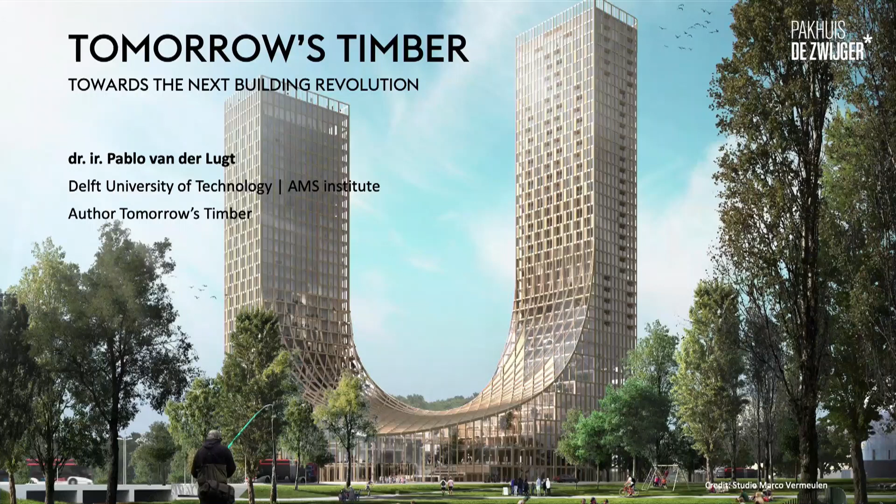Today, I'll show you the future of the building industry. And it's not only circular, but it's also renewable, with an important role for mass timber. There are two important existential reasons why this is so important.

One, climate change. If we look at the greenhouse gas emissions worldwide, then 40% is related to the built environment. If we look at the CO2 emissions of a country such as China and the United States, and we compare it with concrete, concrete would have been the third country worldwide in terms of CO2 emissions. The same applies to metals and plastics combined. So together, they contribute to 15% of the global CO2 emissions.

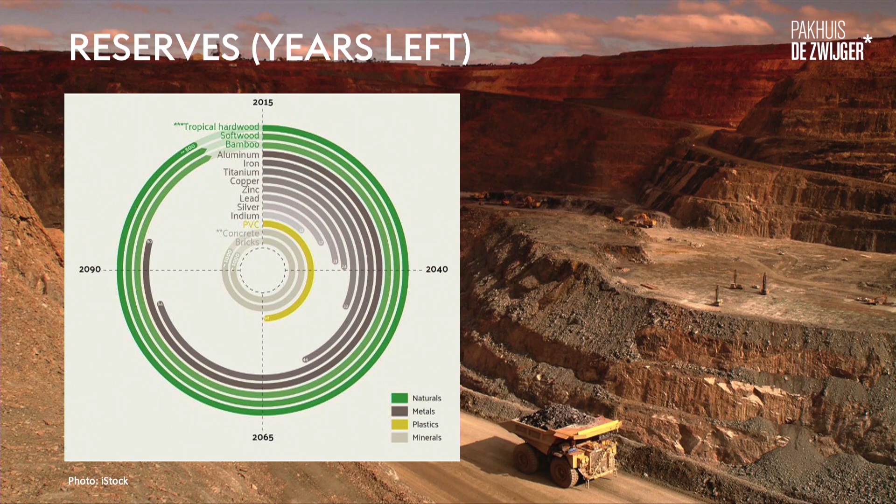In this graph, you see the reserves of the most important materials. And you also see that by the end of this century, metals used in the building industry will be depleted. And the same applies to plastics. And don't put all your money on the circular economy, because only 9% of all our materials worldwide are actually being recycled.

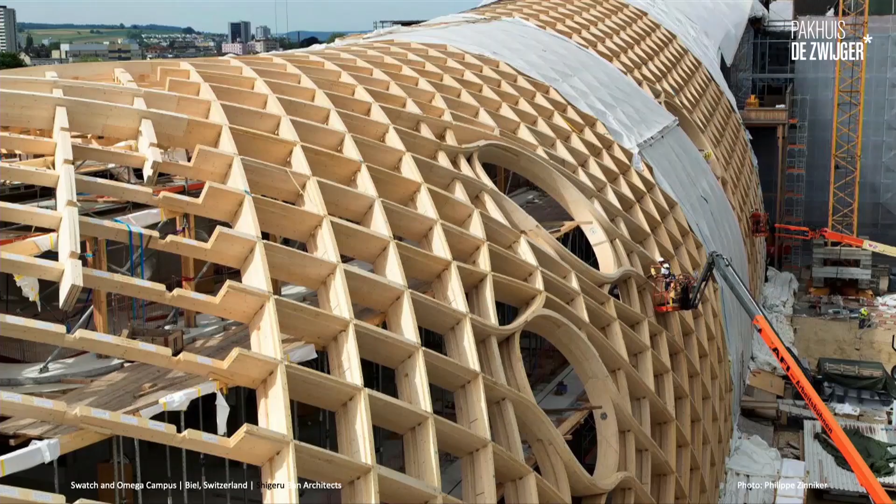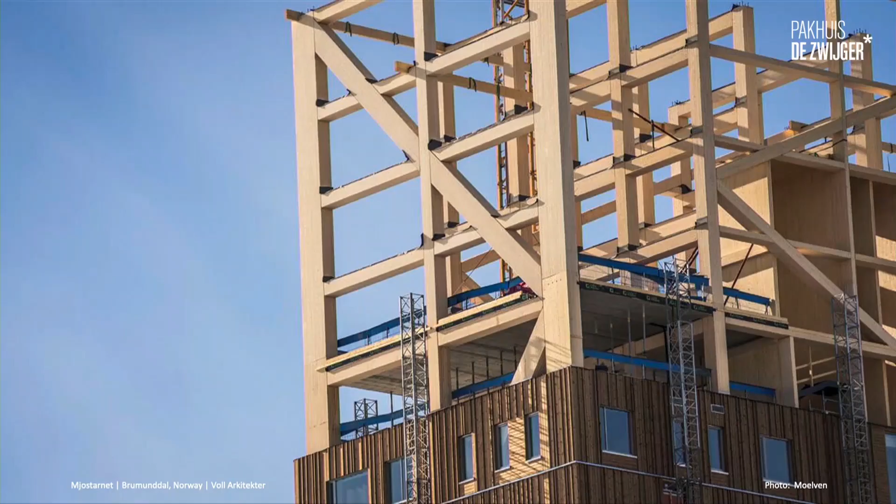I compare it like building with Kapla. Maybe you have done it in the past. Very rectangular, evenly strong wooden elements are used to create all kinds of buildings and fantasies. Well, this is not fantasy anymore, because this is Kapla for grown-ups. This is mass timber. So you can make enormous structures out of uniform elements with mass timber. And we can also build skyscrapers this way. This building is 85.4 meters tall. It's in Norway, built with glulam beams and cross-laminated timber.

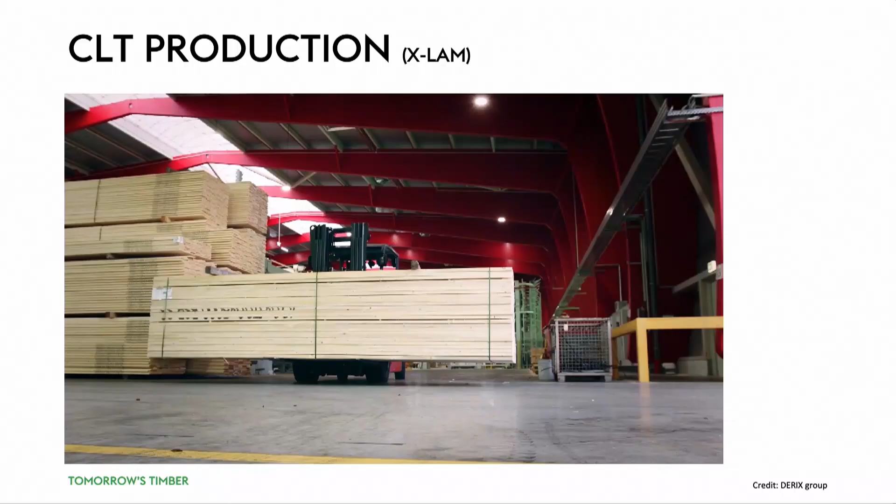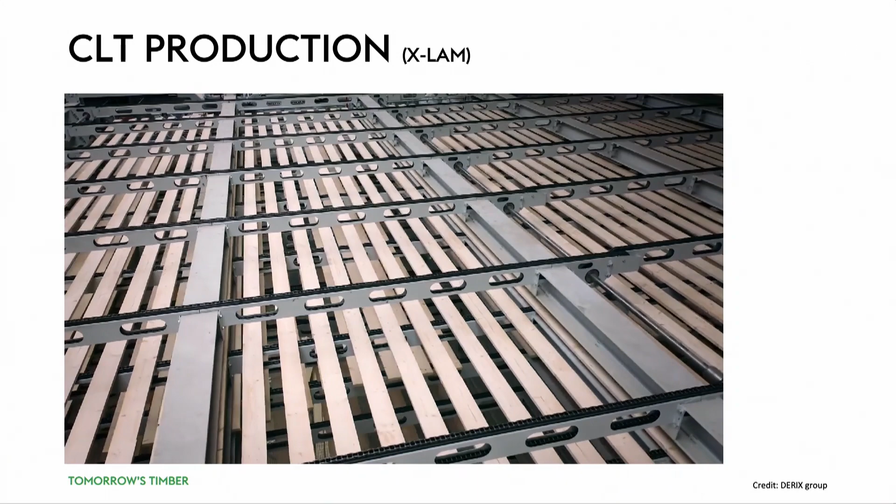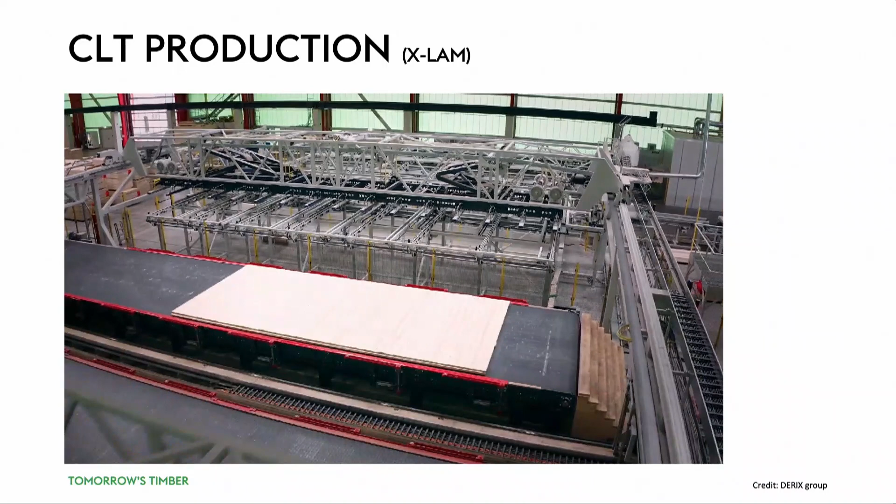I'll show you how this is produced. From sustainably managed forest, you take boards from softwoods, abundantly available. Then these boards are connected to each other in a longitudinal way with a finger joint. So you have very long boards where all the defects are taken out. So uniform strength. Then you locate them on top of each other, and then you cross-laminate them. And then again, up to 3, 9, maybe even 11 layers thick. The glue that's used, it's only 1%, and that binds the walls and slabs together to get a very strong wall or flooring element.

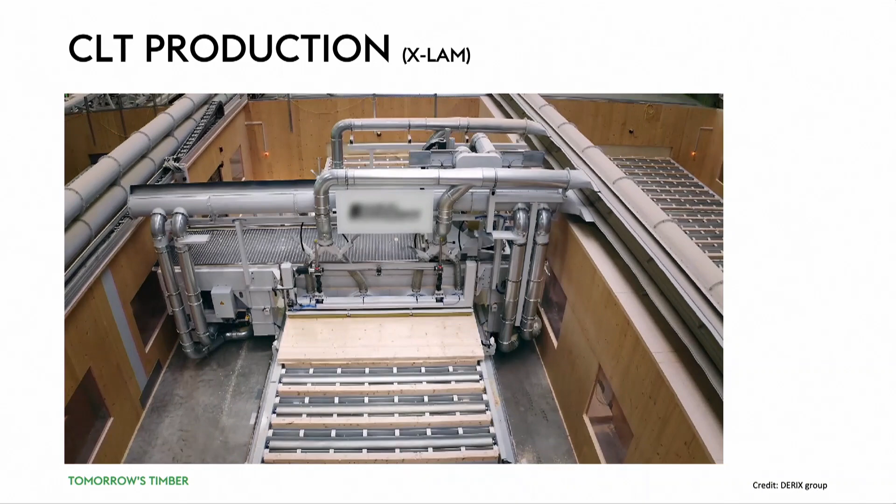The good part is, in the factory, as you see here, you can add all the fittings, all the sleeves for the electricity, for the installations. And then your building site becomes like an assembly site. It's almost like a huge IKEA cupboard. Everything comes pre-packed, you take it out of the package and install the building in a very quick manner.

So this is an example of cross-laminated timber. So you see here the various layers that are being used. The top layer can have, for example, an oak finish or another more luxurious wood type. So this way we can build very high buildings in a very quick way.

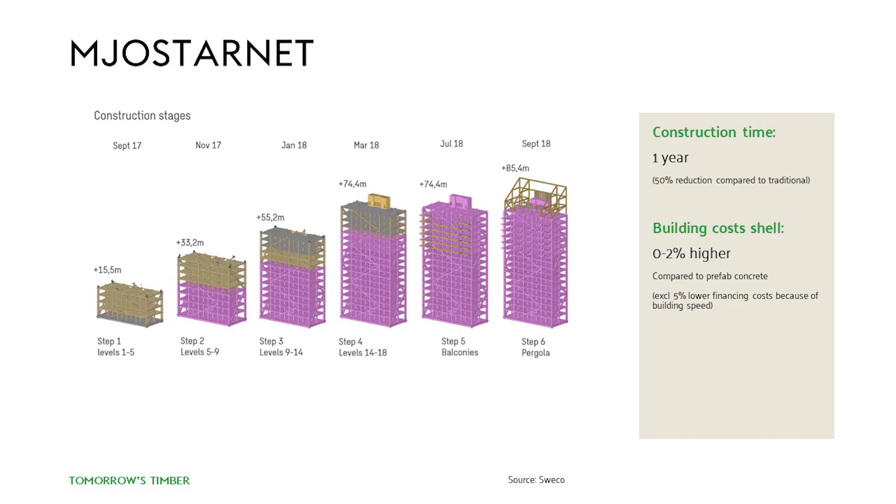The tallest building so far, the Mjøstårnet building in Norway, I told you, almost 86 meters high. And it was built also with all these prefabricated elements. And the construction time was 1 year quicker than it would have been built in in situ concrete. Altogether, the building costs are more or less as high as building in prefab concrete. Then if we look at the biggest myths, because I hear your brains already thinking, okay, very interesting, but what about fire safety? Is this durable?

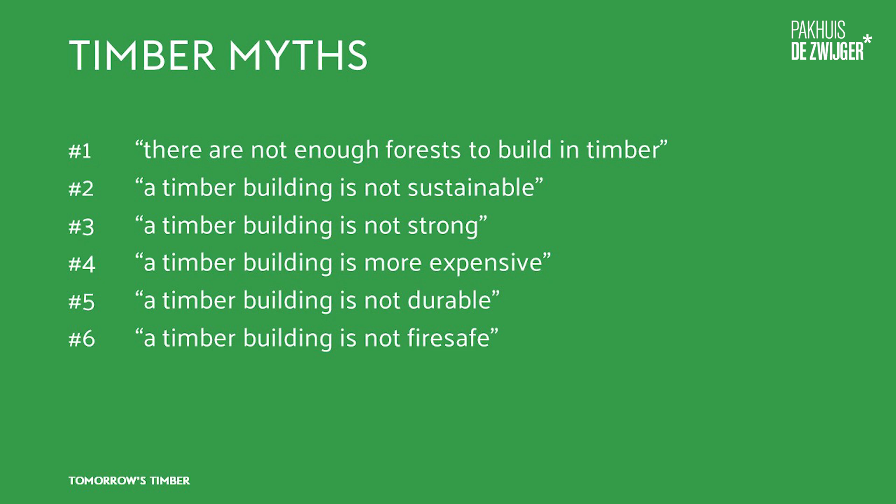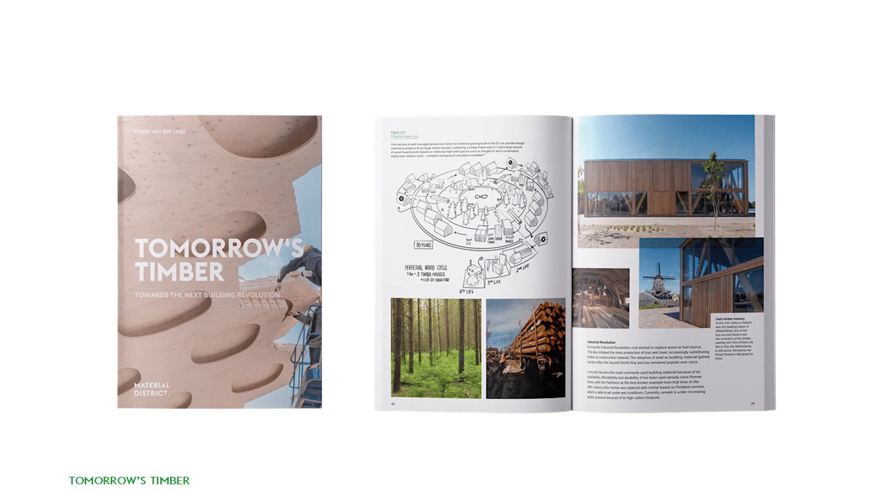So there are many myths about mass timber building. And actually I had these questions also about 5 years ago. And I did a lot of research about it, and I published it in this book, Tomorrow's Timber. And I can tell you most of these fables can be dispelled. And I'll tackle a couple of them in this presentation.

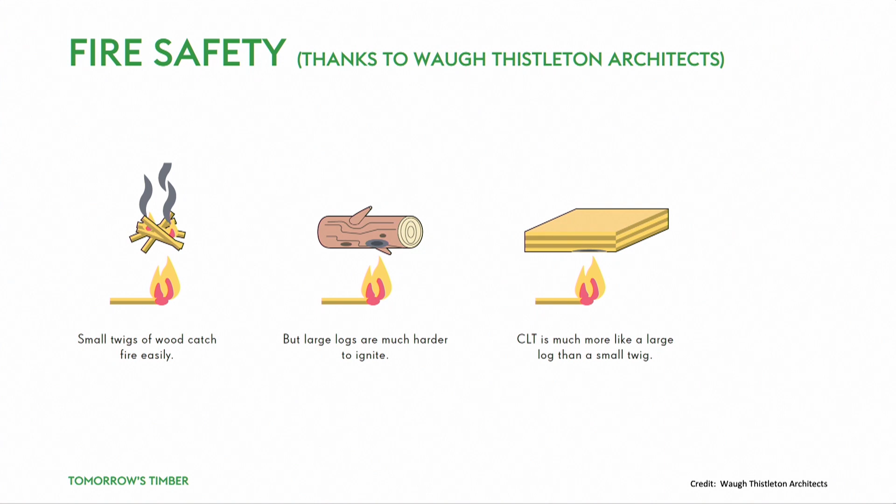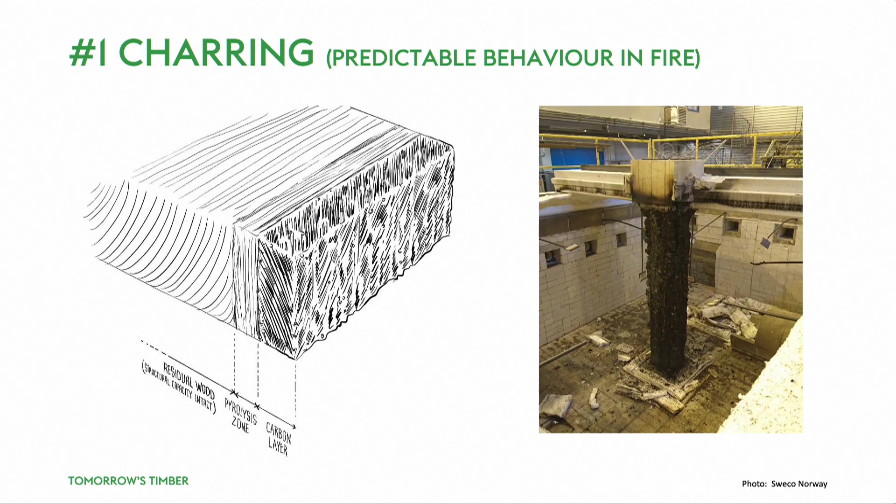Fire safety. Well, if you try to put this block in your fireplace, you can imagine what happens. It will extinguish, it won't burn. You maybe have a little bit of charring. And that's also how we tackle fire safety in mass timber building. The example on the right is a one-on-one fire safety test on this Mjøstårnet building in Norway to reach the 120-minute fire safety class. And they just do it by over-dimensioning slightly and knowing that at the outer layer of the wood, there will be a charring layer. And behind this charring layer, the wood will keep its structural quality. So you can exactly do the calculations.

Usually it is combined with encapsulation, so part of the timber will be finished, for example, with gypsum board, and combined you easily reach all the fire safety classes. So usually it's done this way. One of the surfaces is kept intact, and further a little bit of over-dimensioning, taking into account the charring. So these are fables that can quickly be dispelled. Fire safety is not an issue, durability is not an issue.

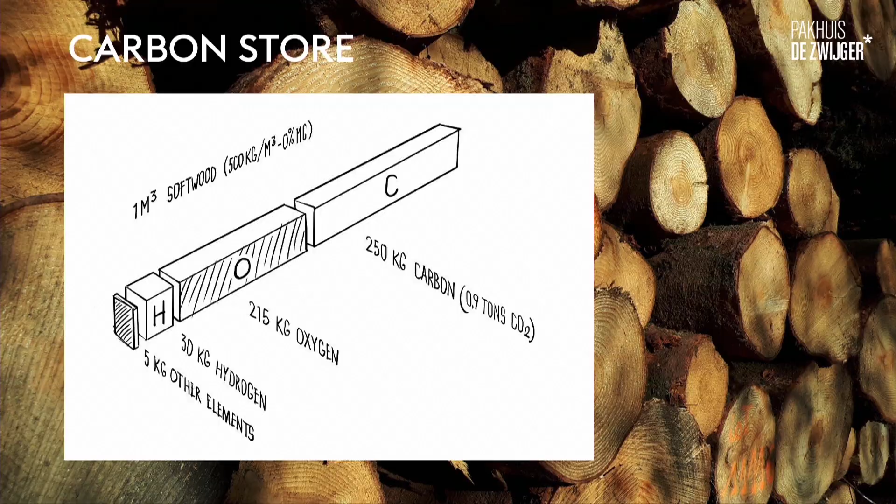But let's look at the more positive things about building with wood, because building with wood gives a lot of fun and energy. It's good for the planet, it's good for people. So let me quickly take you through some evidence. Well, first of all, when trees grow, they absorb CO2 from the atmosphere. This is the magical formula, photosynthesis. Storing CO2 in the wood, oxygen as a bonus in return. And through the lifetime of the wood, the carbon will be locked in the material. Half of the wood's weight is carbon coming out of the atmosphere. In general, you can say that 1 cubic meter of wood captures almost 1 ton of CO2 for the lifetime. So it's a kind of carbon store.

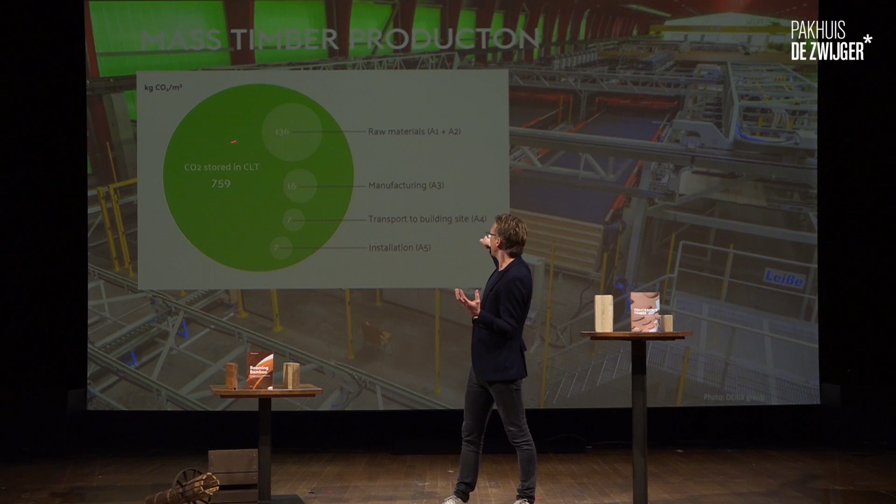And then if you look at the CO2 emissions during production of CLT, I just showed you this factory, you can see here that CLT uses a little bit lighter wood species, so it captures a little bit less CO2, almost 3/4 of a ton. And then you see during production, in total, glue and energy for pressing, sawing, transport, it is only 20% CO2 emissions compared to the CO2 locked during the lifetime of the material.

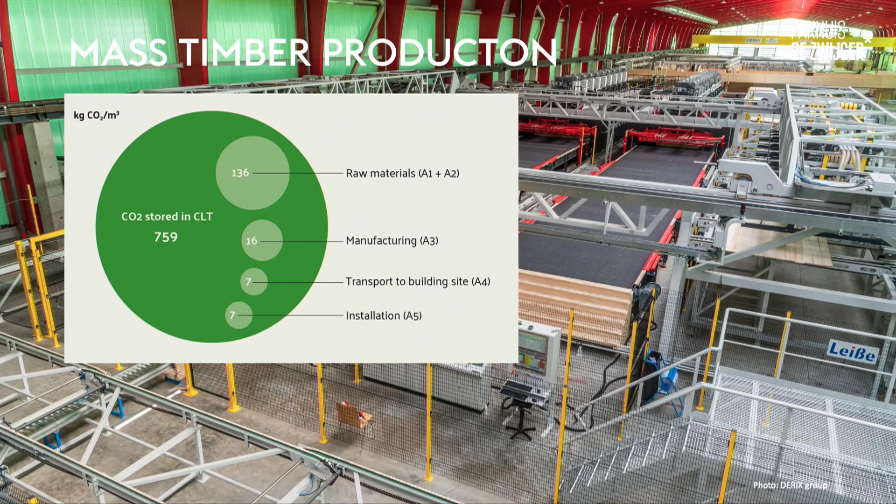And then if you take into account that all this wood comes from sustainably managed forests, so a tree is harvested and a new tree is planted back, then you can understand that the forest becomes a carbon pool, and the carbon will grow, and then it will be harvested. And then the wood, you shouldn't burn it for energy, but you're going to put it in the built environment, and then you do it again. And the carbon will be locked for even longer in the built environment. So you have two carbon pools, the carbon in the sustainably managed forests and the carbon in the built environment, the buildings made out of wood.

So if you start building with wood instead of concrete and steel, per ton of wood applied, you save around 1.5 tons of CO2. So that's the third benefit of mass timber building. And then these kind of buildings actually are a carbon store, a huge carbon bank. You can look at it.

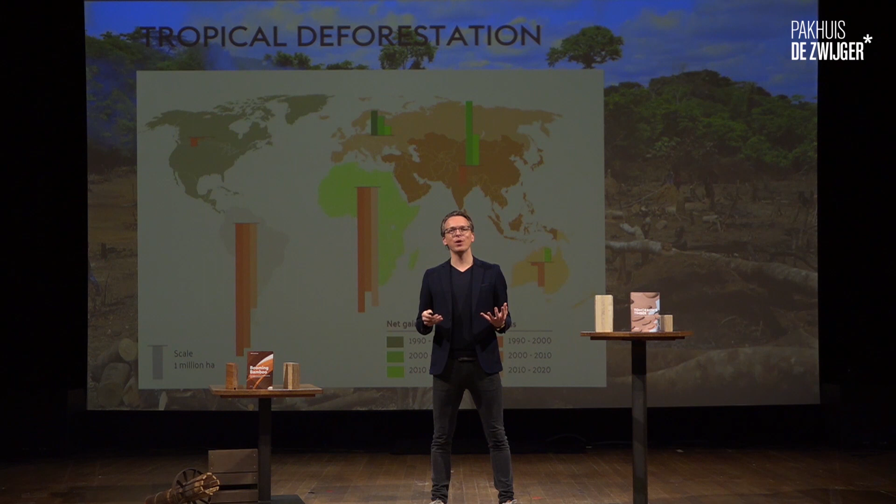So, carbon negativity. Second point has to do with the renewability of timber. And what always fascinates me, I always get this question: but if we build in wood, then we have to cut the tree, and we will lose all our forests. But people don't think where the metals and the mineral materials come from. They don't grow back. But I understand where it comes from. It has to do with all our memories related to tropical deforestation.

And yes, tropical deforestation is an issue, but the driver for tropical deforestation is not the demand for wood. It is conversion of land for large-scale agriculture, for palm oil, for soybean production, and especially for the meat industry, conversion to cattle land and infrastructure. These are the drivers for tropical deforestation. And if you look worldwide at the forestry trends, yes, this tropical deforestation continues. But in the northern hemisphere, you see that the area of forest is actually increasing for the last 30 years in a row.

And if we then zoom in to the European forest, there's an area of about 180 million hectares in forest. That's about 40% of the European land cover. It grows by 0.3 million hectares a year. Almost all these forests are sustainably managed. And more than half of them are actually sustainably certified following very stringent chain of custody guidelines by FSC and PEFC, safeguarding social, environmental and biodiversity issues.

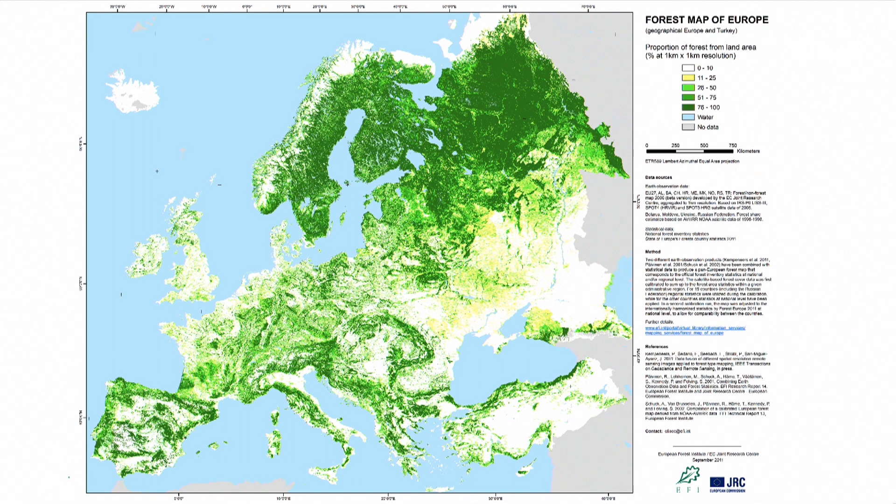So this is what that looks like in numbers. Every year there are 800 million cubic meters of wood that grow. Of this, 500 million cubic meters is harvested. And about 50 to 100 million cubic meters of that is available in quite accessible places. So we could ramp up by 50 to 100 million cubic meters right away if we build more factories.

And if we look at the building deficit and home deficit in the European Union, but also in the Netherlands, and then look at this additional potential capacity of 70 million cubic meters, and taking into account converting that to mass timber products, you will have about 30 million cubic meters. A house like this, a private home, a big one, uses about 60 cubic meters. An apartment would be 30 cubic meters.

That means that just based on the annual available capacity, we can produce in a sustainable way 500,000 houses each year, just from the available additional stock that we have in our European forests. So don't worry about the availability of wood. And I don't talk about cutting trees, it's harvesting trees, because they are sustainably managed in our forests in Europe.

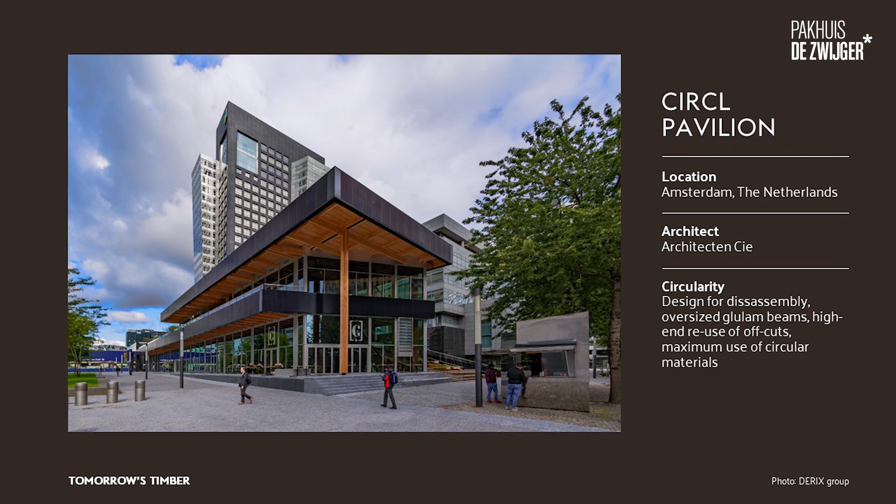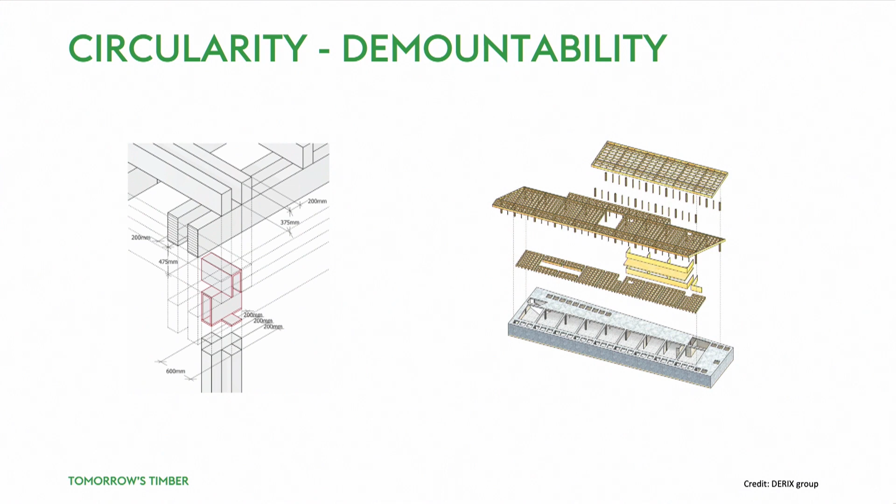And when bankers start building in wood, then it becomes interesting, because then you know the business case works out well. Here you see how these demountable connections are made in this building. And the members, the glulam members, are slightly overdimensioned to make sure that at the end of life they can be taken back and have multiple uses in new applications. The producer and the contractor have already said, I will take the timber back because it just holds so much value. Never are you going to burn this because it just retains too much value.

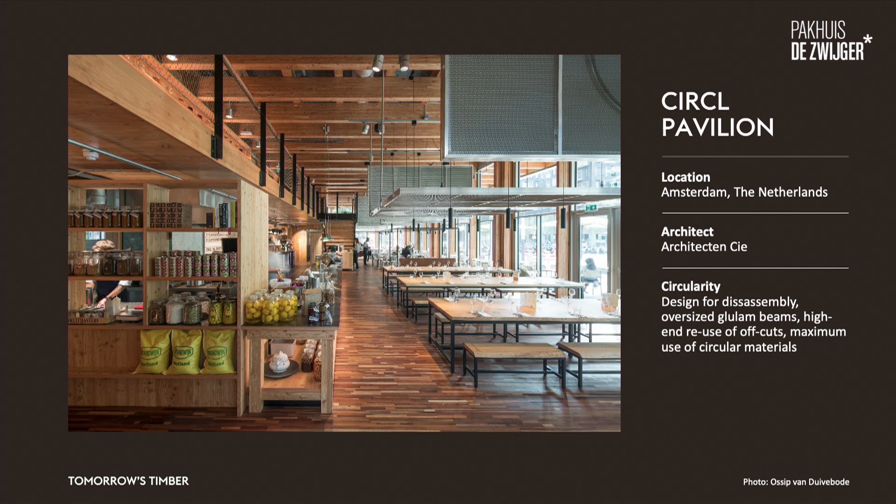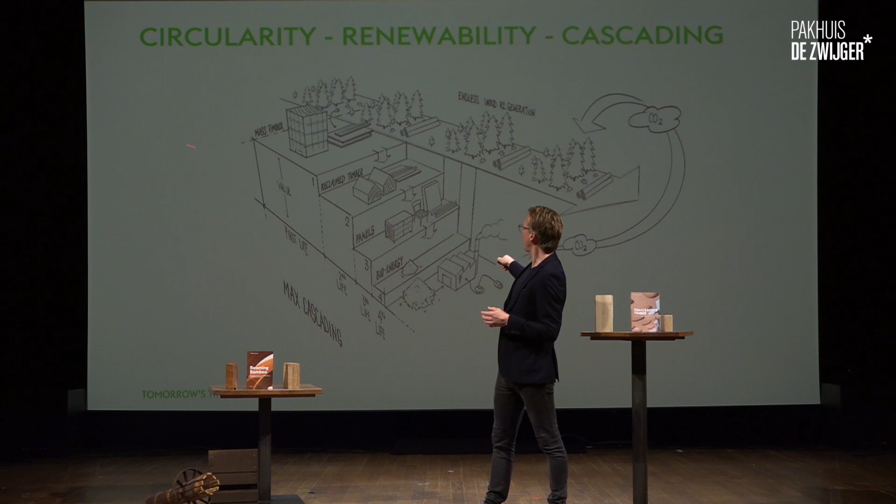This is what the CIRCL Pavilion looks like from the inside. Also the interior is fully circular. And then when you start thinking of circularity, and you look at the renewability also, and take that into account, then if you have a mass timber building, the first life will easily be 50 years or longer. Then if you build it in a circular way, the second life will be maybe as long. So you easily reach the 100 years.

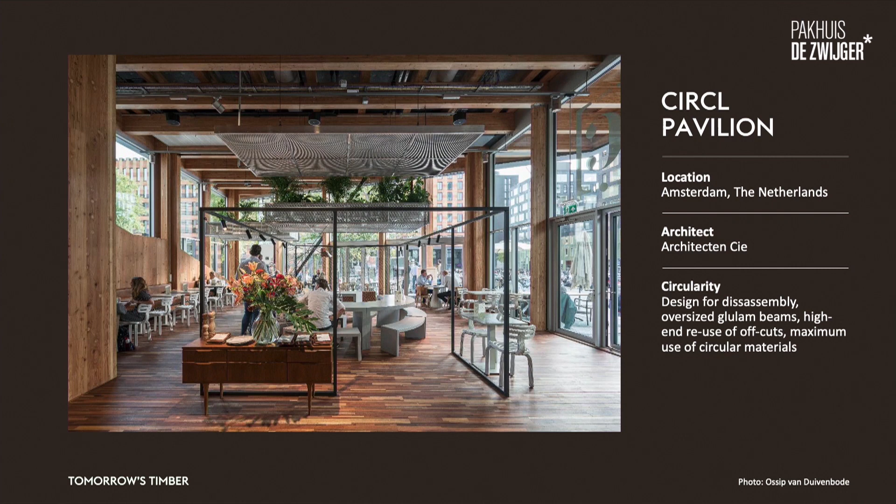Only then you start chipping it for panel production. And only in the fourth life are you going to use it for bioenergy. That makes sense. And in the meantime, you see that the trees have grown back 2 or 3 times in sustainably managed forest. To me, this is what circularity is about. And if you look at the CIRCL Pavilion, actually the flooring is a second life use of timber from other buildings. And you can also do constructions this way.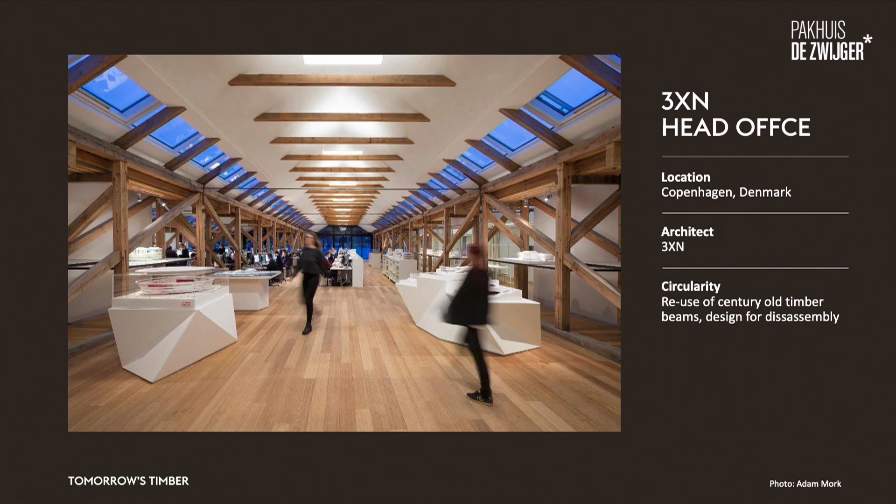This is an architectural office, 3XN, in Copenhagen. And they make a one-on-one reuse of these beams that are recollected from a nearby naval warehouse and reused in the bearing structure. So this is very beautiful, locking carbon, but also circular building.

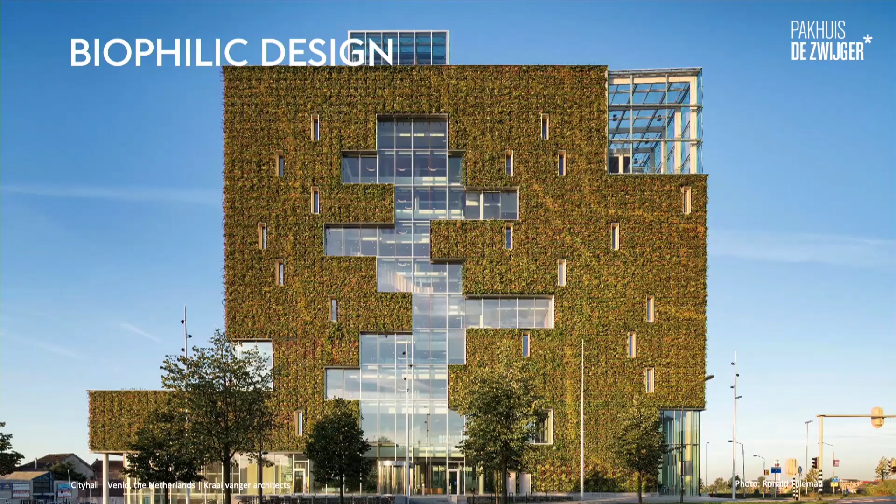Then the fourth aspect, that has to do with us as people. We are basically creatures from nature. That's why we like to be in nature. That's also why we connect so much to natural materials, also on the inside. This is called biophilic design. And there are more and more studies that show that people love to be within a natural environment. This building is a beautiful example of a work environment where biophilic design is taken into account. The facades are totally green.

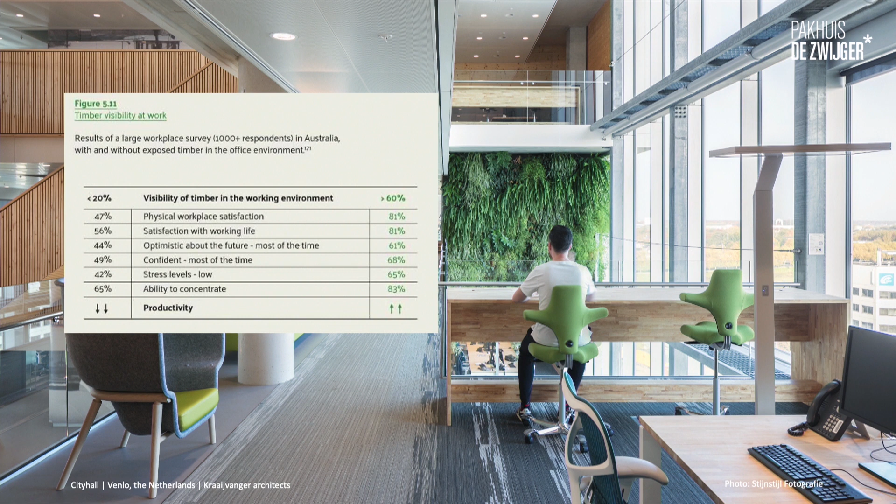This is City Hall Venlo, by the way, in the Netherlands, built following the cradle-to-cradle principles. And in the interior, you see a lot of natural materials being used, and a lot of plants. And we see more and more research that shows that people living in an environment where biophilic design is taken into account, and natural materials in the surfaces are a very important aspect of that, have better productivity, higher concentration levels, lower stress levels, and this is also directly related to the visible use of timber.

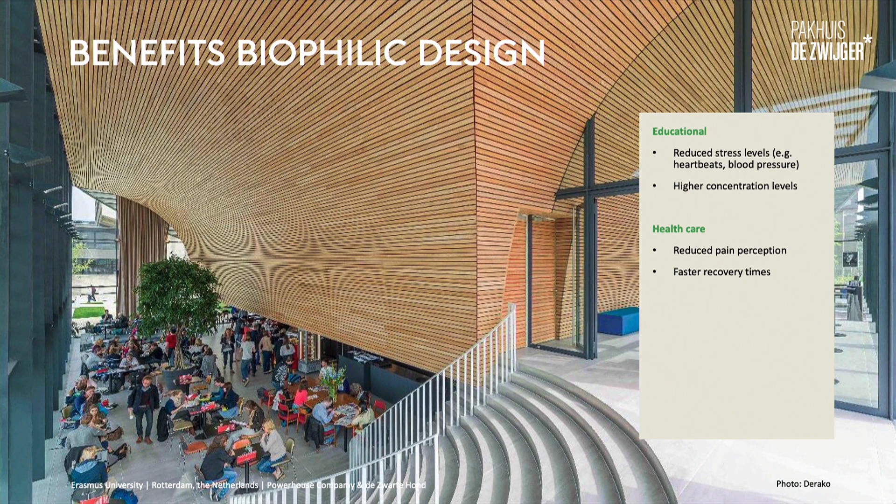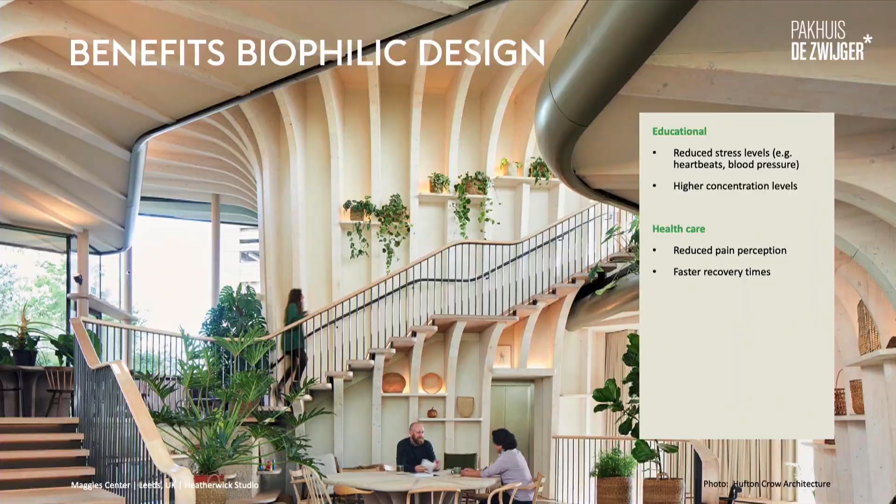This also applies to our schools and educational institutes like universities. There are various studies that show that people love to work in a neighborhood where wood is in the surroundings and have higher concentration levels. Hospitals, cancer centers, the Maggie's centres in the UK, they all apply a lot of wood in a visible way in the interior, showing even quicker recovery rates and at least lower stress levels. This is another example of a Maggie's centre in the UK.

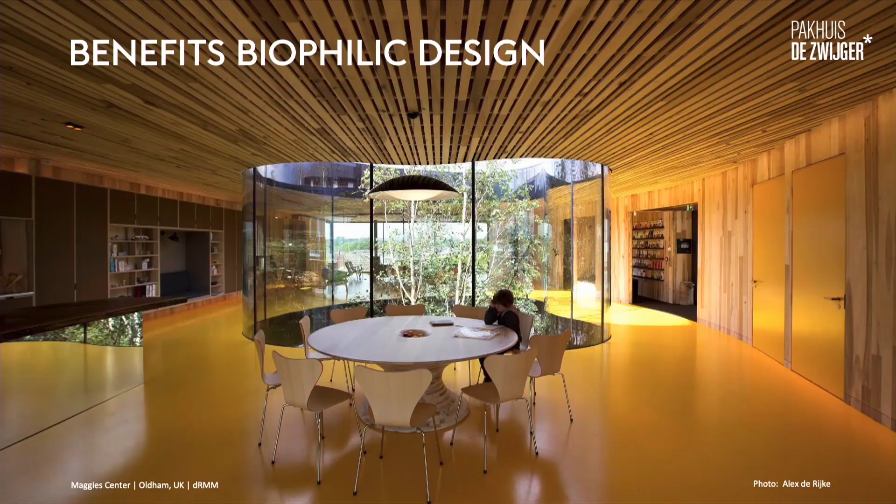Look at the tree that's located right in the middle of this building. So you see the source where the wood comes from and how it is applied. Very interesting aspect as well. So these are a little bit more, let's say, environmental and people aspects of why people should build in wood. But there's a very practical aspect to it as well. Mass timber has major advantages during the building process, and that pays itself out.

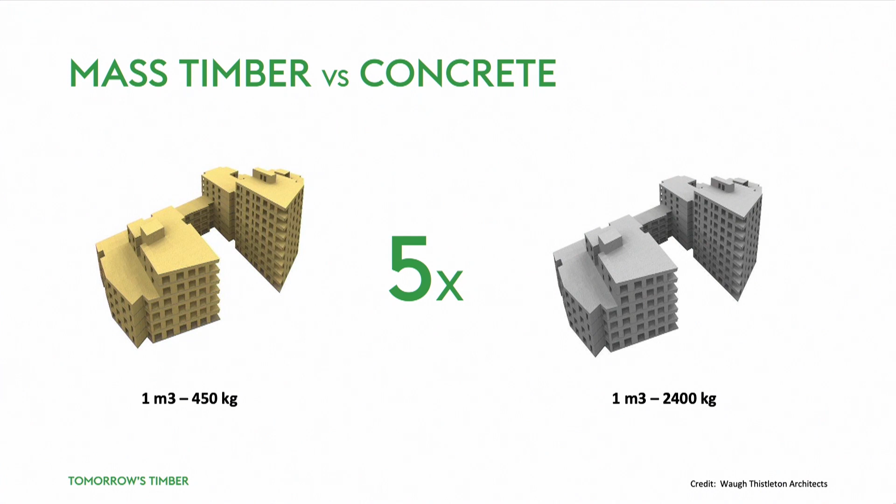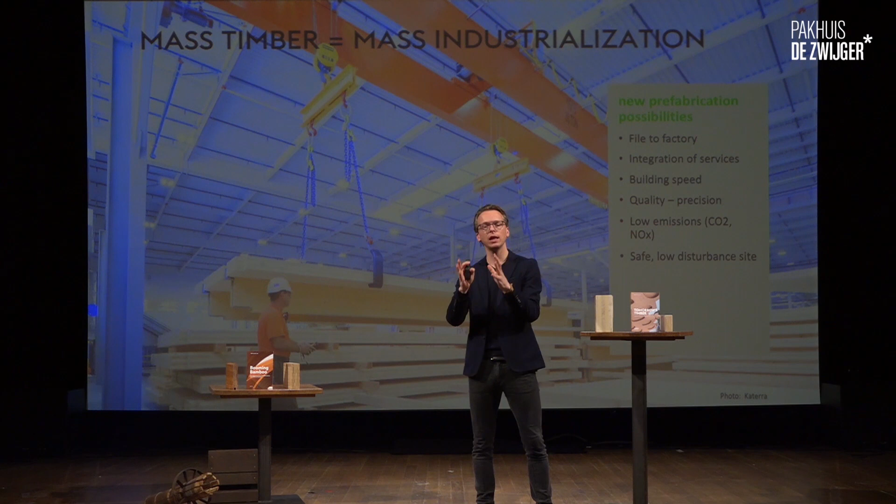If you look at mass timber compared to concrete, it is 5 times lighter. That means you have to build in a different way. And the prefabrication possibilities of building in mass timber are huge. Using a BIM system, a building information modeling system, you can send your design to the factory, which can directly prefabricate those big wall, ceiling and flooring elements, including all the installations. This way, the building site will become, as I mentioned in the beginning, an assembly site.

And you might see this building. I want to show this as a case. Dalston Works in London by Waugh Thistleton Architects. You might think, well, this is not wood.

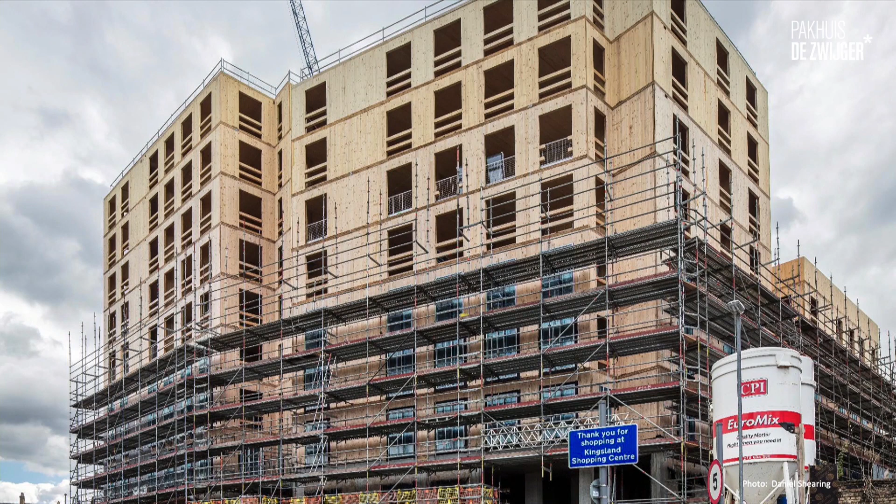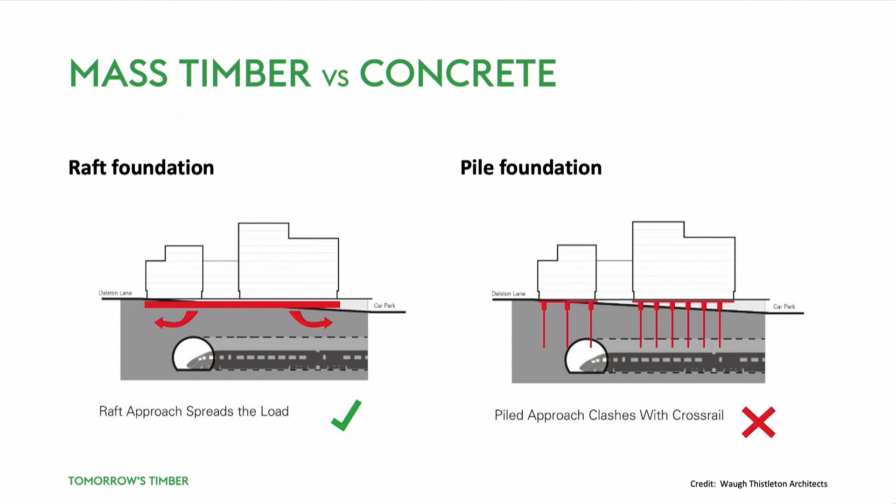If you look at the inside, you don't see any wood. But it's fully made out of mass timber. They used mass timber here for practical reasons. Why? Because this one is in the middle of London, and there was a tube going below. So they needed a light structure. They needed a raft foundation. That's why they started looking for a lighter building construction method, therefore mass timber.

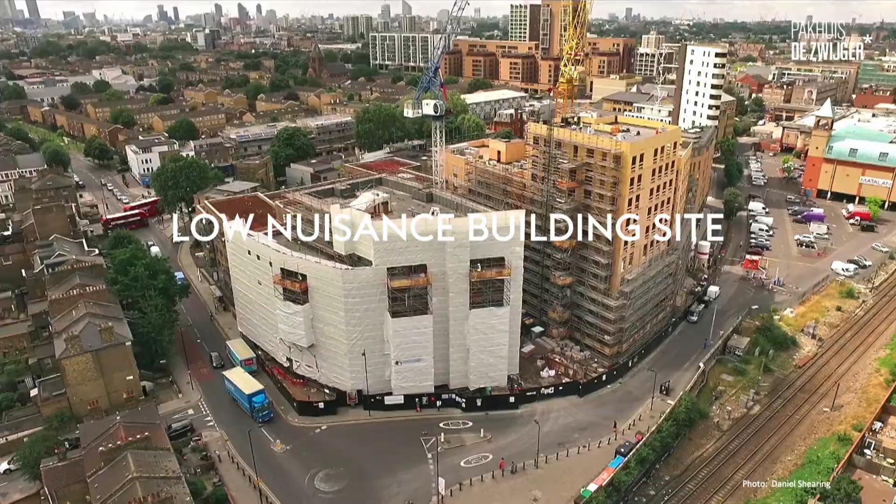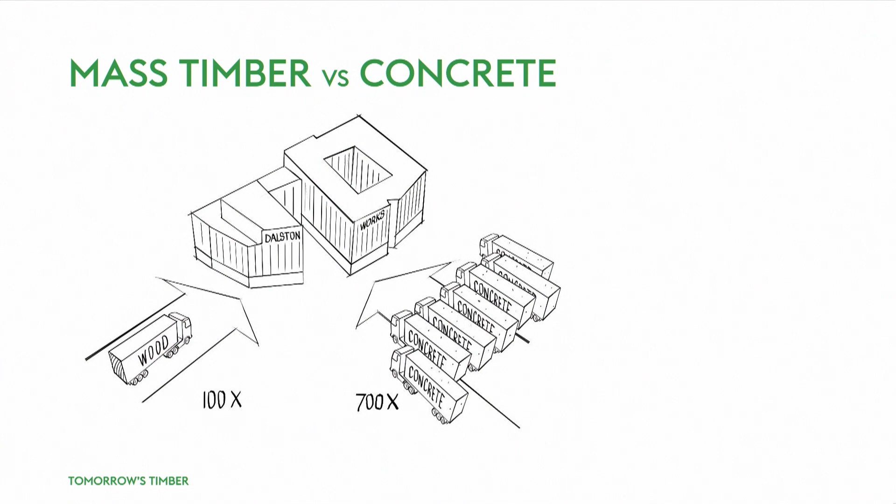Also, look at the building site, right in the middle of London. Very little space. People don't want noise here. So they wanted to make the building process as short as possible, with as little nuisance and noise from heavy trucks that supply the building materials as possible. Using mass timber only meant 100 heavy truckloads instead of 700 if this building would have been made in concrete.

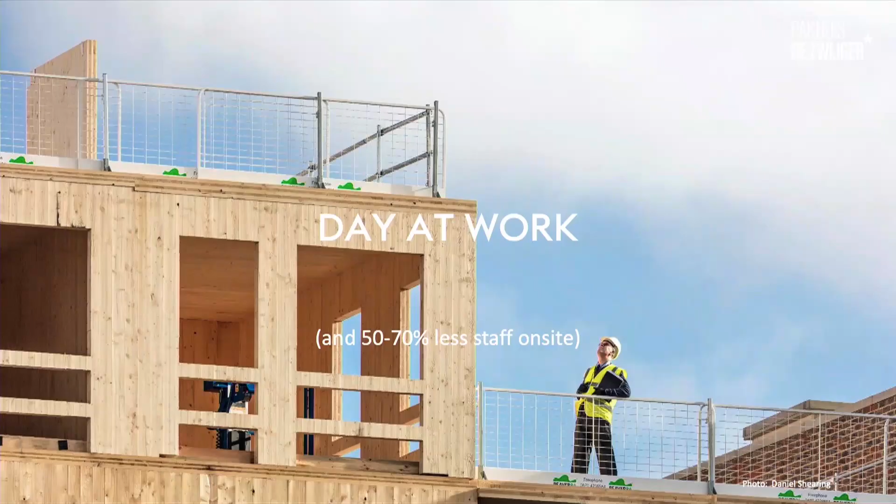The building time was 9 months quicker because of this IKEA-type building system, just an assembly site. The cranes are smaller. You need less people on site. You can sometimes even use electrical cranes, so also the nitrogen emissions are very low. In general, the building site becomes a fun site to be at. You have less people, and the people enjoy it more to work on such a building site.

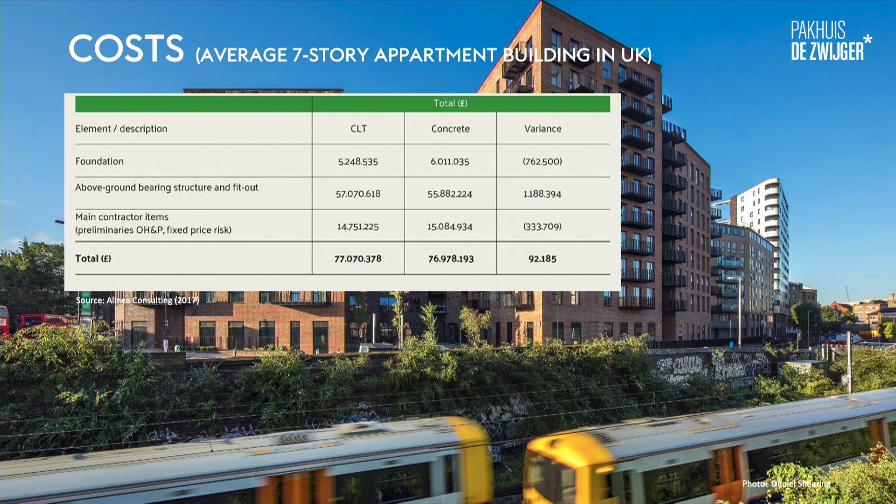You can imagine this. And if you then break down the costs, and this is from a typical UK case study for a 7-story apartment building, and you compare CLT with concrete, then you see that for the foundation, CLT will be less expensive because it's lighter. But for the above-ground structure, the costs are still higher. The material costs are still slightly higher. Then, if you look at the processing cost, the costs are lower. And if you add all of this together, the cost difference is really marginal, slightly higher.

But in the future, there must be a carbon tax. Climate change is coming. We have to act, including a carbon tax. The difference will go in the favor of mass timber building. And then, to finalize my presentation, I want to give you a future outlook. What will this mass timber revolution look like? What can we expect in the coming years?

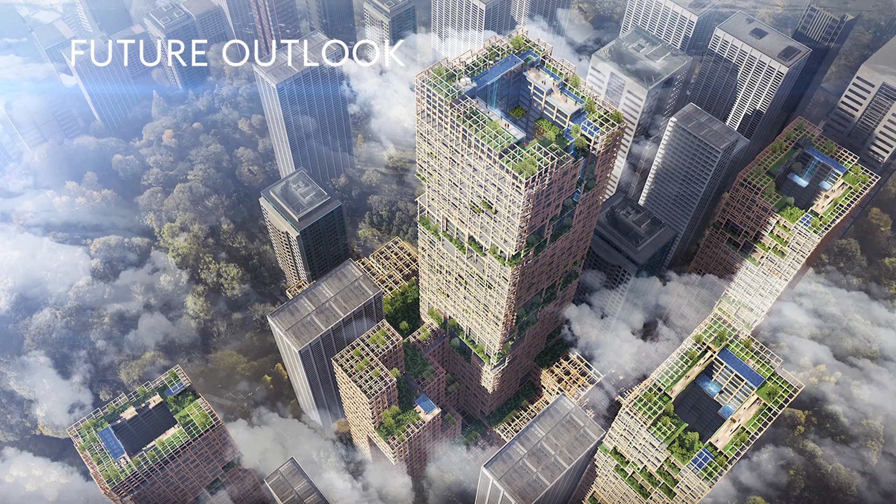If you look at the legislative part, you see that the governments are also taking their responsibility. In France, 50% of the new buildings by the government have to be made in mass timber. If you look at the European Green Deal proposed by Frans Timmermans, there will be not reforestation but afforestation, so additional forest. 2 or 3 billion trees will be planted until 2030. So this will really beef up the building industry related to mass timber.

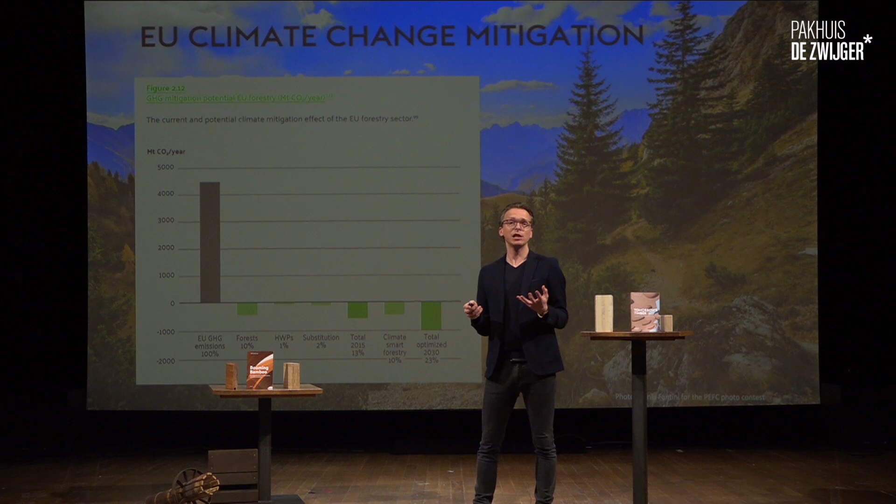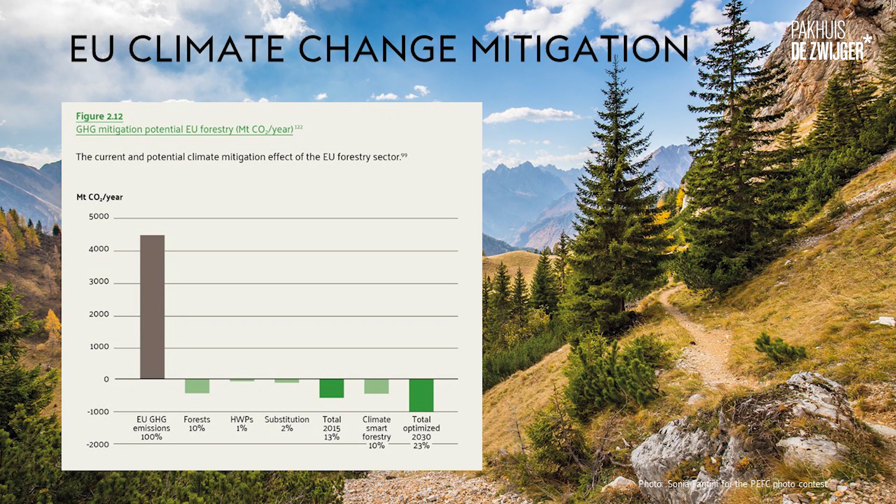And this is important because if you look right now at European CO2 emissions and how much is compensated by the European forestry industry, it's 13%. If we do climate-smart forestry and do this reforestation and afforestation in a sustainable way, it can be 23% in 2030. So a quarter of all our CO2 emissions will be solved by forests and forest products. So it's not a surprise that this is a very promising route.

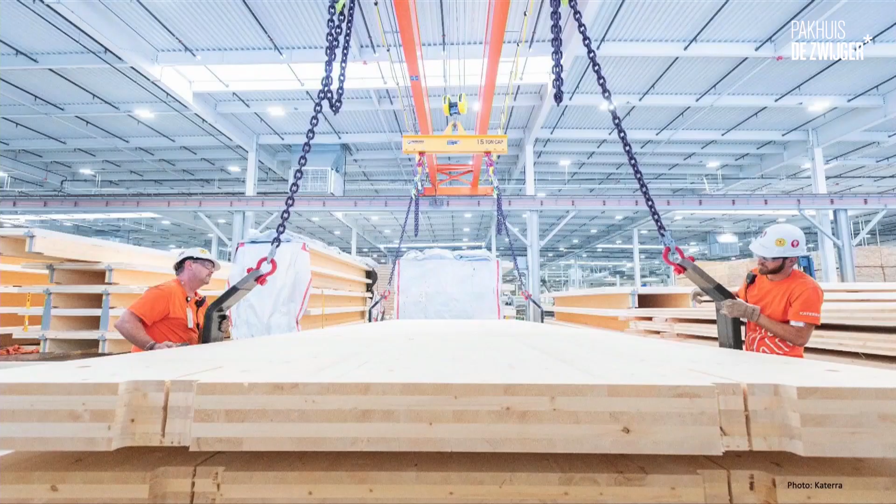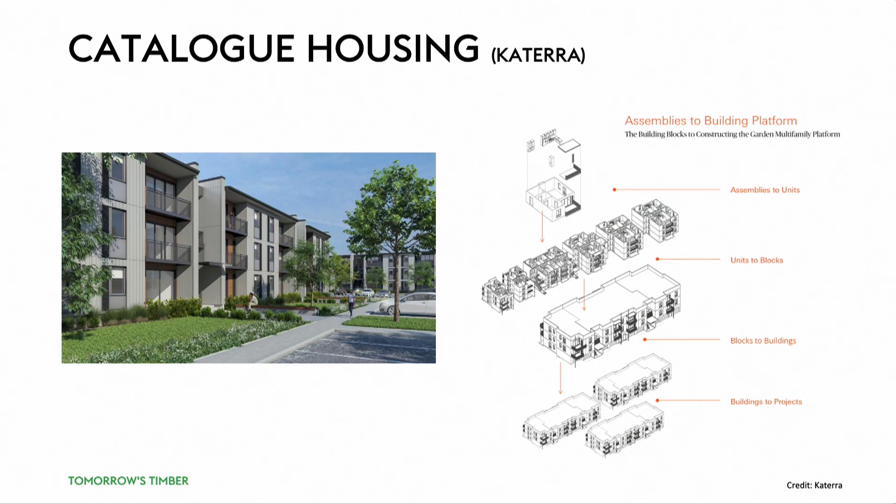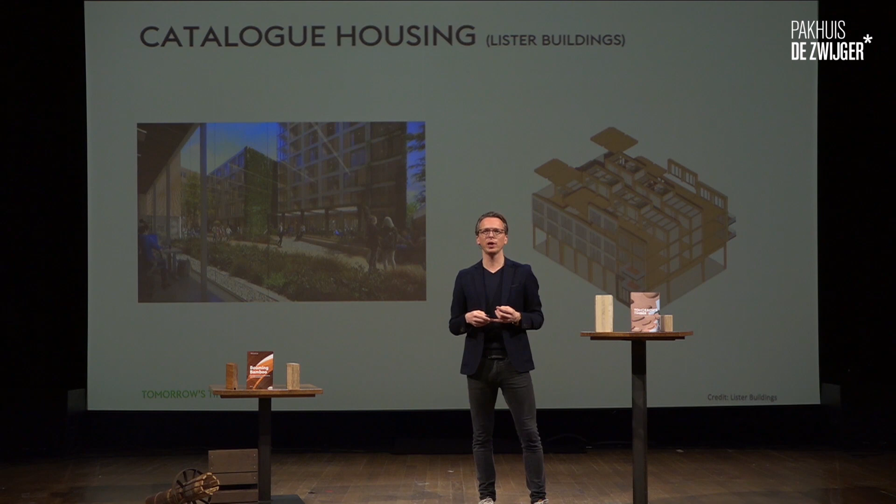And in the future, we also see structural applications made out of bamboo. But if you look at the larger scale, we'll move into those big factories where we have catalog house building. This is Katerra in North America, making all this catalog housing from mass timber products produced in the factory, installed on site with a lot of customization possible. In the Netherlands, there are similar developments. This one is from Lister Buildings. They make a circular system made out of glulam elements and modules, which can easily and quickly produce multi-story apartment buildings.

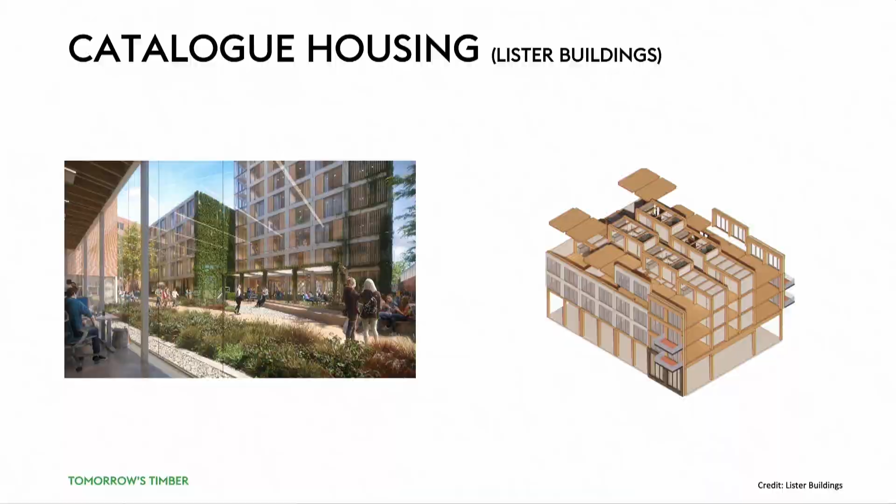And this way, the cities of the future will look a lot different. They will look a lot more humane. They will store carbon. They will attract nature. It's up to us as architects, as developers, to make this happen. Because I believe that tomorrow's timber starts today.